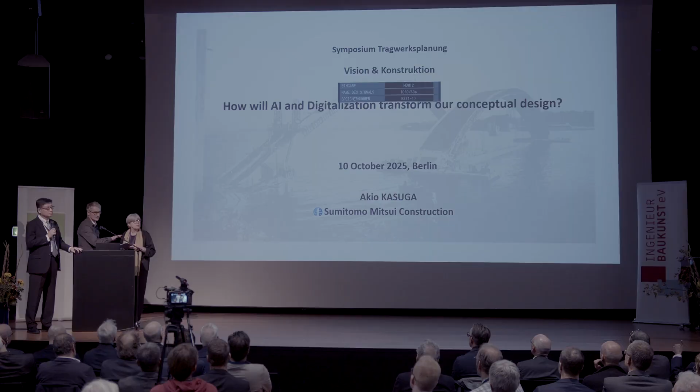So this is kind of my proposal to the Presidium, and they will discuss it at the end of this October. It's been a long time, my problem as a bridge designer, and today's topic theme is addition, and it leads to insight and selection.

So I'll show you some books I've been reading where this idea came from. This is the first one, which I read in a 1968 version, by a Japanese engineer, Dr. Nakayama. He says to use your 5 senses, and memories sometimes connect incidentally, and it needs quality over quantity. This was my first book, and it was very understandable for me.

In 2024, Dr. Iwadate, a neurosurgeon and professional of the brain, wrote a book that says intuition occurs in default mode. Everybody has a default mode, and 80% of the brain's energy is used in default mode - for example during running, walking, or taking a shower - and the brain uses a wide range of areas. Sometimes unexpected memories connect with each other, so we cannot control this activity of the brain. It's important to accumulate and fully understand memories. He's a professional, and it was also understandable for me.

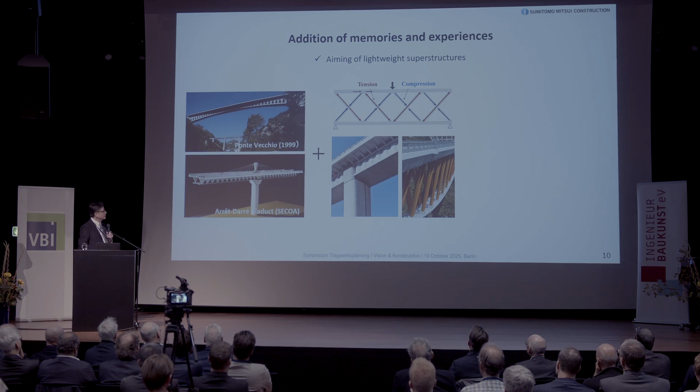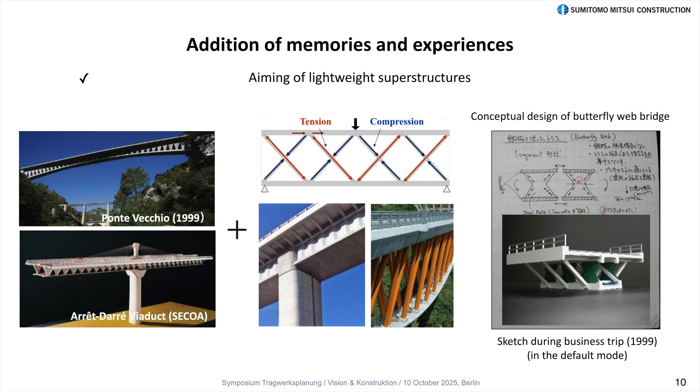I had an aha experience on a business trip from Osaka to Tokyo on the train. I thought the mechanism is a double Warren truss, and I changed the truss to a plate, like a butterfly web. The advantage is that the horizontal shear force is not concentrated on the truss, but instead the plate is just cut, the steel plate, into the butterfly shape.

So the manufacture of the steel is very easy. This is the first concept: the butterfly steel web. But after that, we had fiber reinforced concrete, and I changed the steel plate to concrete. Finally, we built the highway bridge in 2013. It took more than 10 years from the sketch to the real bridge.

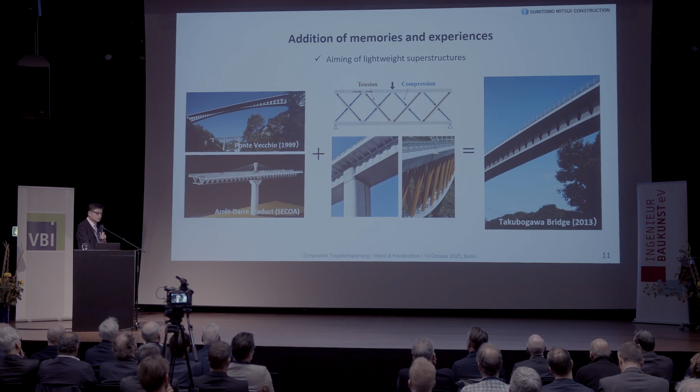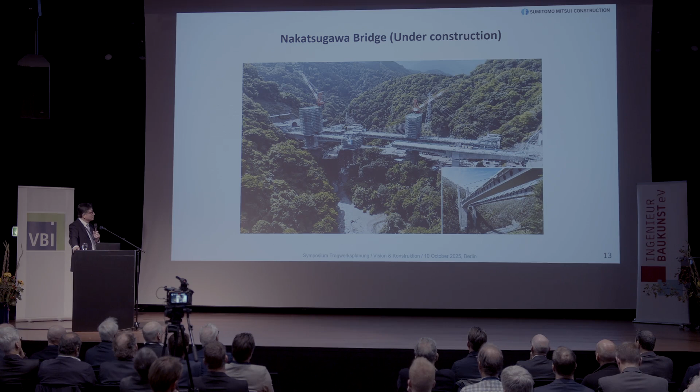Now we have six of this type, and one is under construction with a span over 170 meters—an extradosed bridge plus butterfly web. So this is my personal thought on future design, conceptual design.

When I joined the company, it was 1980, just before the start of computers. We used calculators—I'm not from the generation that used hand-operated calculators and slide rules—but still, we designed bridges by hand. In 1990, I was in the United States, and that was the first time I met the Apple computer. I was so surprised.

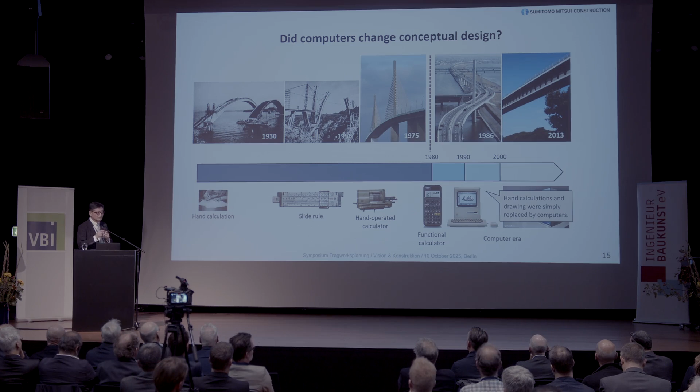Now we have supercomputers, but everything is based on calculations that were originally done by hand. So the process went from by hand to computer, and now we have AI and quantum computers. We don't know what the future holds.

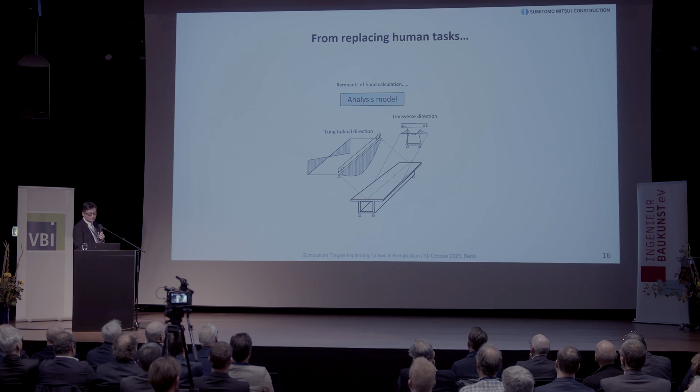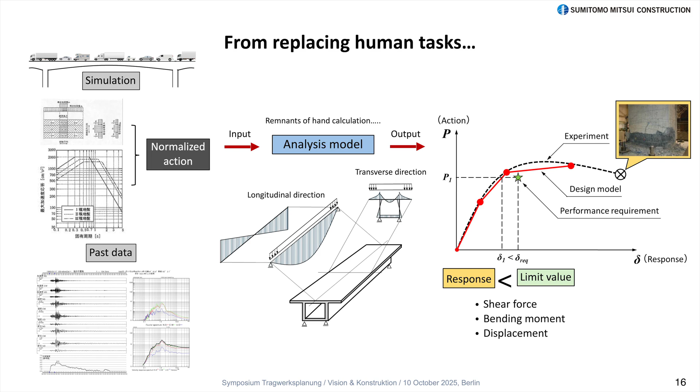I'll explain this basic concept. We already knew that the bridge is 3-dimensional, but longitudinally we use a beam, and transversely we use a frame. Also, every load is normalized for earthquake action and live load action, into a simplified model, with performance only in 2 dimensions, based on calculation by hand.

But from now, by using a 3D model, and also all of the actions—for example, load—simulated for 100 years, taking into account the change of society. For example, in Japan, our population is decreasing. Also for earthquakes, we can use a very heavy model, up to 20 kilometers, including 1 million buildings, and also soil conditions, by using a supercomputer.

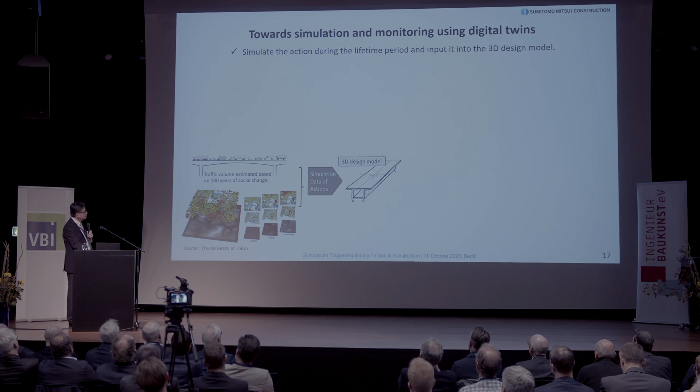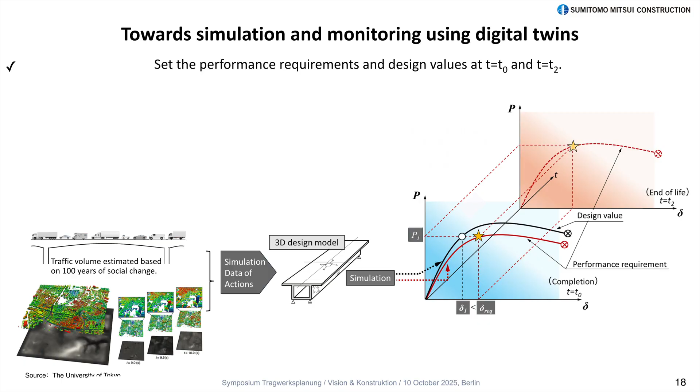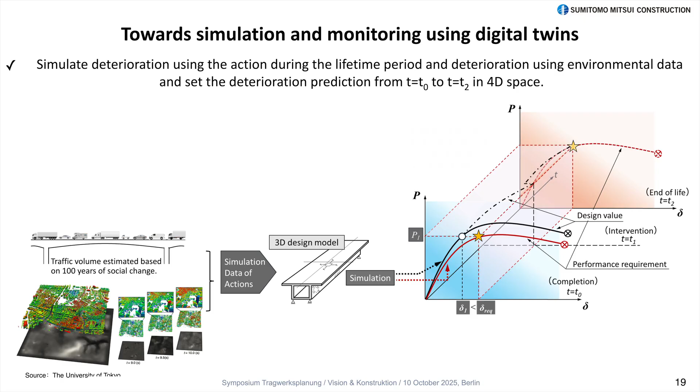So the simulation of the actions goes into the model, and we get performance and design data like this from t equals 0 to t equals 100 years. Then we simulate over time from t equals 0 to t equals 100, including the deterioration of the structure.

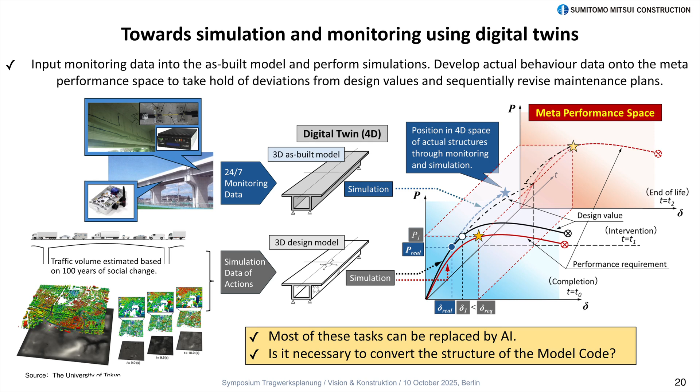Finally, after completion of the structure, we create a digital twin. We have two models, and every structure is monitored and simulated into this digital twin. Now we can find where the real structure stands—this is the design, this is the performance, this is the position of the real structure in real time, and here is the position at t equals t1. So now we can compare the design with what's happening in the real structure.

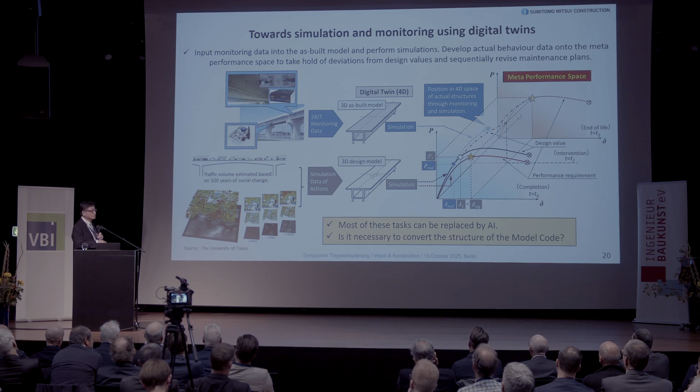So finally, almost everything will be done by AI. In this situation, what should we do? I am chair of Commission 10 of the FIB—Commission 10 is the model code. I think it is necessary to convert the structure of the model code from the present version to a transformed version, so that everything changes, and the boundary between the model and the action becomes fuzzy.

So this is the nature of conceptual design. Conceptual design, I think, is knowledge plus experience multiplied by passion. Without passion, everything is zero.

And also, conceptual design has a philosophy. You know that philo means love, fraternity, and sophia is knowledge. So we love knowledge. But do you think AI loves knowledge?

I don't know. Also, our knowledge has its own weight. My knowledge is different from Mike's knowledge and everybody's knowledge. But AI learns from cyberspace. I don't know, but usually they don't have any weight of the knowledge.

And also, humans have trial and error. This is not in cyberspace. Also, our memory is at a different level in each personality, and we store our memories using 5 senses. So this remains for a long time and becomes seeds that enter the connection.

The connection of memories we cannot control, but we have to make some effort to train our brain. And also curiosity—humans have curiosity, and connect one thing to another in our brain. So being interested is very important.